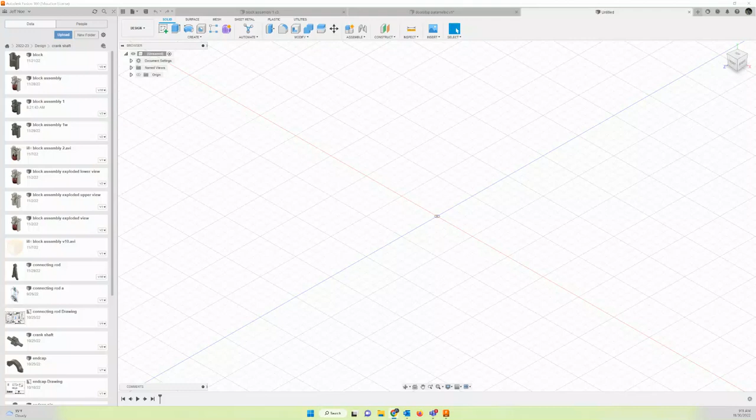So far we should have completed all the components of the engine block project. Everything I've given you to this point has been general, just an overview of the process, and I've left you to come up with your own methods for creating those designs. We haven't had as much practice with assembly, so this second video is going to go through it step by step in some detail. Let's get started.

You're seeing my screen. Where did my mouse go? There we go. This is my canvas.

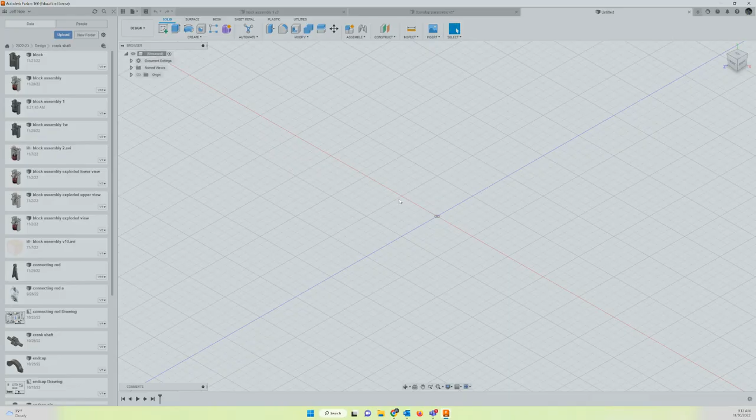It's untitled, so the first thing I need to do is save the file I'm going to create my assembly in, or when I start inserting components it's going to give me an error. So let's hit save, and I'm going to call this block assembly video, since I'm using this to create the video.

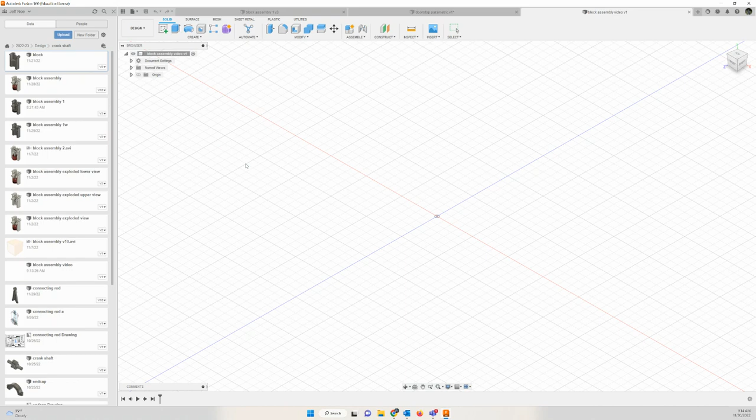The first thing I'm going to do is bring in my block. I'm going to insert into current design. There's the block, everything looks good, I don't need to move it around, we're just going to start working from here. Click OK, there's my block.

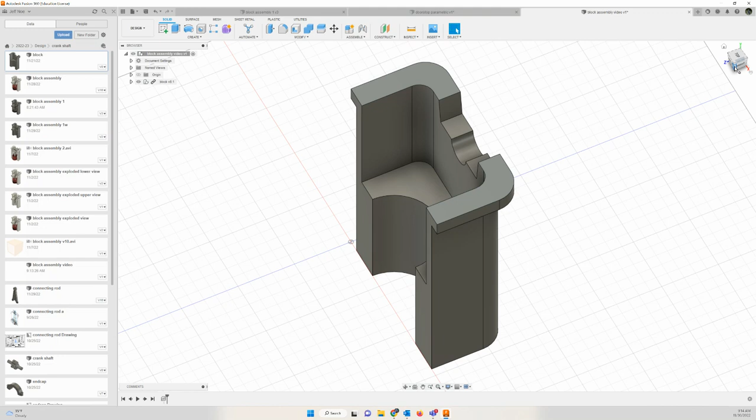Spin it around, make sure you have this overhang on the back. The depth of the overhang, or the top surface here, should be 3/8 of an inch. So you've got 0.375 inches in this section, and then this width of 3.75 inches. The dimensions are very precise - everything has to fit perfectly.

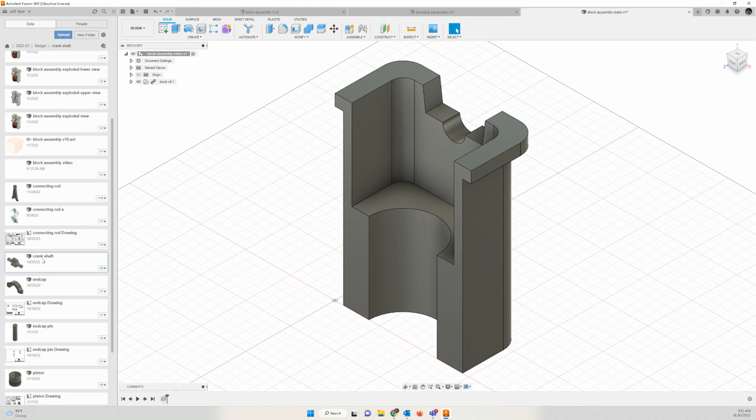The next piece we're going to bring in is the crankshaft. So I come over, here's the crankshaft, right click, insert into current design. Let's line it up the way we want it - I'm going to grab the wheel here and rotate it around 90 degrees. There we go. Let's move it out away from our design and up so it's out of the way. We can work with it there. That'll be good, let's click OK.

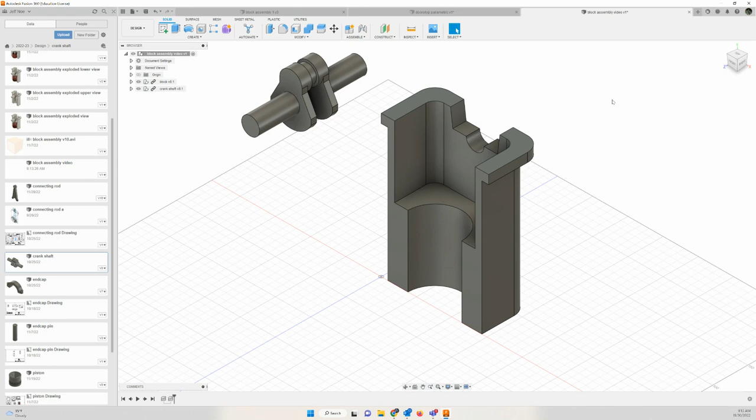Before we go any farther, let's ground our block because that's not going to move. So I'm going to ground the block, right click on it and ground. This will be part of your assignment - I want to see that red pin showing your block is grounded.

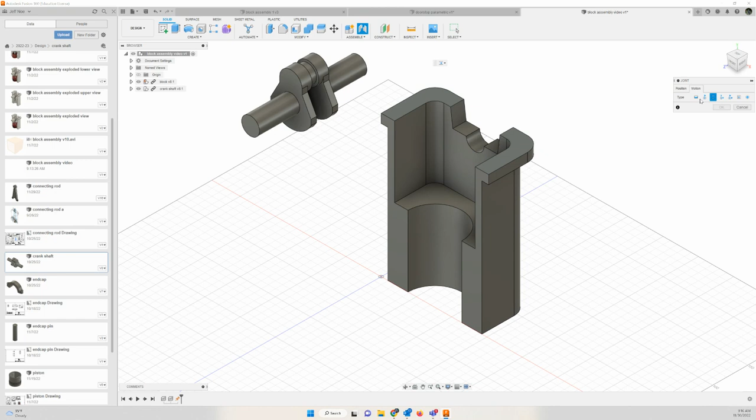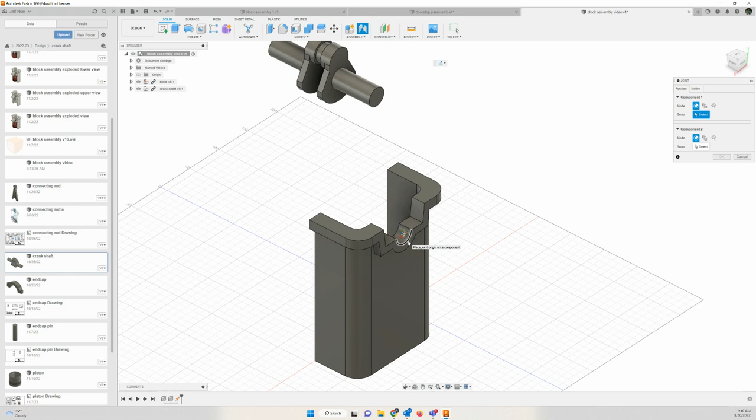Let's create our joint. This first joint's going to be a revolute. So I selected revolute, and the crankshaft will be component 1. What we're going to need to do is match up - I wish I'd put those a little closer together. Center of the end of the crankshaft here, and that's got to be centered to this arc and the outside portion of it. So I'm going to select the center of this face.

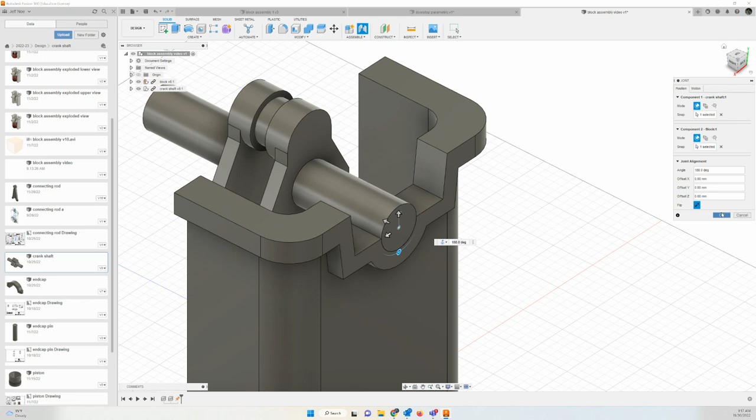Good, zoom in here, there's the outside. Hold the control key, select that center. Revolute - looks good. I'm going to click OK, go back to the home position. Easy enough, first one's in place.

Let's bring in the connecting rod. Here's the connecting rod, insert into current design. There it is, let's move it out. We're going to spin it over, 180 degrees.

And that should be fine right there. Let's click OK. Now this second joint that we're going to create is also going to be revolute, so the crankshaft is going to be able to rotate within the block assembly.

The connecting rod will be able to rotate around this section of the crankshaft. So it will be able to, as the crankshaft turns, move up and down, but the crankshaft will spin inside of it.

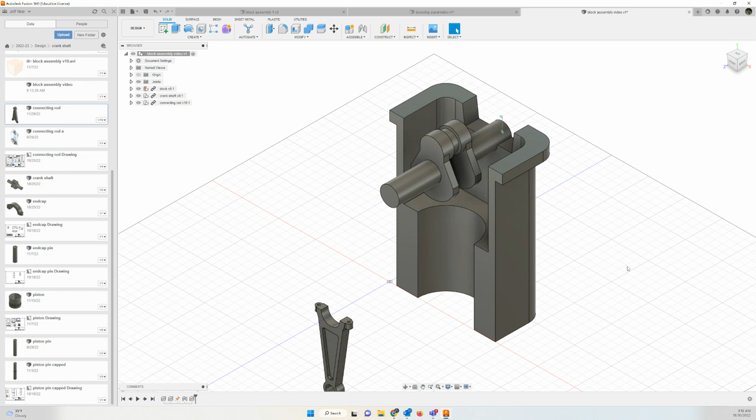All right, so let's create our joint. Start off with the connecting rod. I'm going to take the center of this arc on the outer edge. Control key, there's the snap point. Now, bring this around.

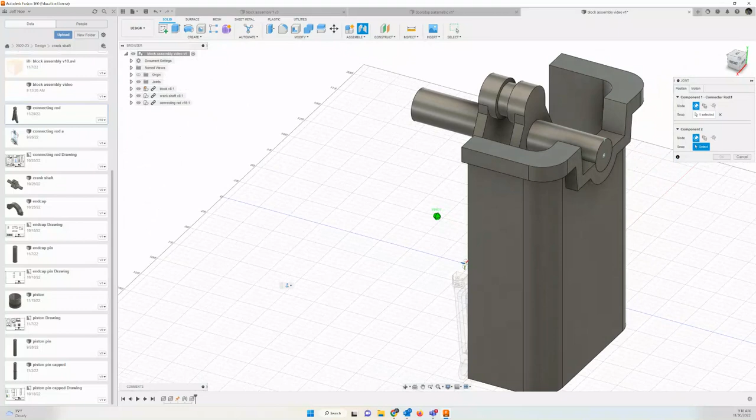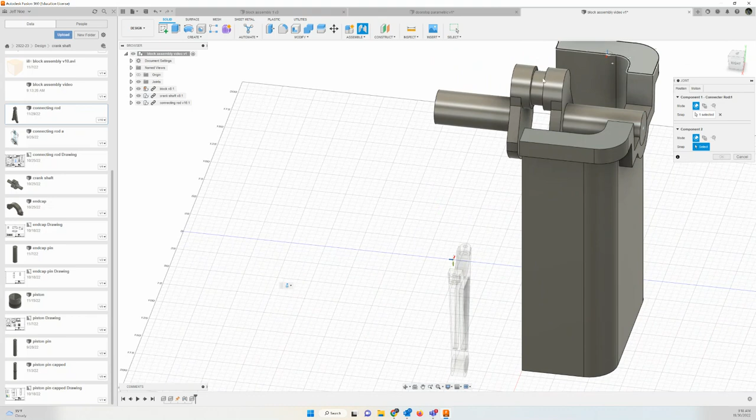So this face here, the center of this face to the center of that arc I just chose. Let's just think about where I selected it. So this outer edge, I'm going to have that match up to the edge, center of the edge of this face. So there's my edge. Let's zoom in so we can see that pretty clear.

Right there's the edge, control key, select it, revolves around it. I want to go to the right side and bring it into view. All right, there's my y-axis in the background.

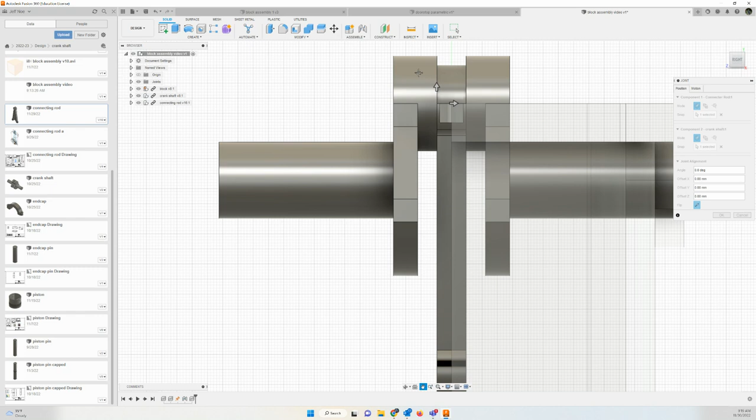It's right in the middle, and my connecting rod fits perfectly in this cutout on the crankshaft. It's not into the crankshaft, these bigger faces here or here. So that looks perfect. Click OK. Back to the home position. So the connecting rod's in place.

Let's put the end cap in place next. We're going to line up the holes on the end cap on one side, and that'll be our snap point. So insert into current design. There it is. Let's bring it out just a touch. We'll move it up here. Click OK.

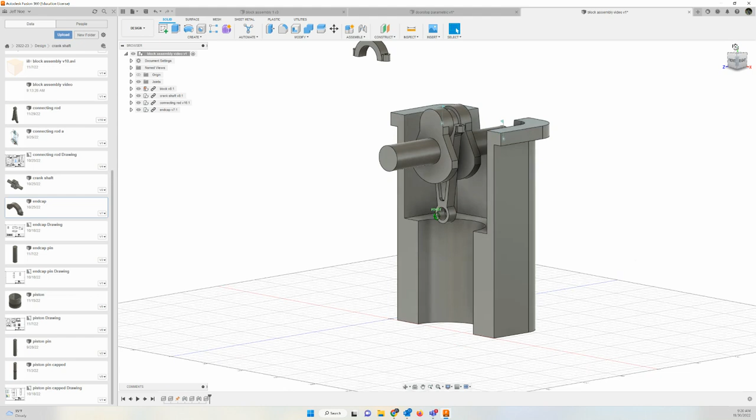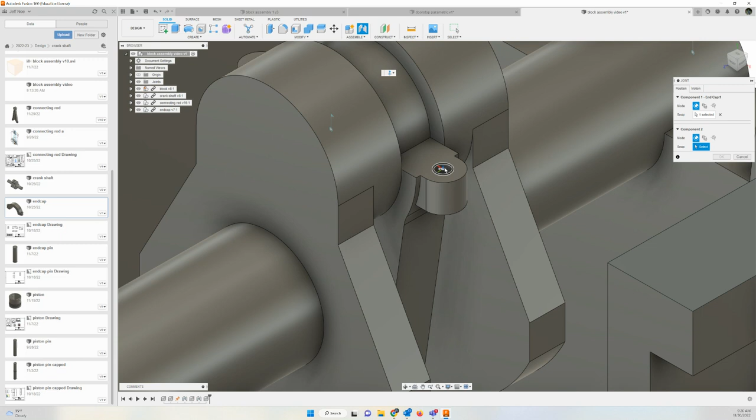So we're going to snap the center of the bottom hole to the top of this hole on this side. Let's roll it over, create our joint, zoom in. There's the hole, the outer edge, control, select it, back to the home position, zoom in on this hole. There's the hole, control, select. Oh, that's not the motion we want.

We want this to be rigid. There's no reason for that end cap to move. Click OK. Go to the home position. The end cap's in place.

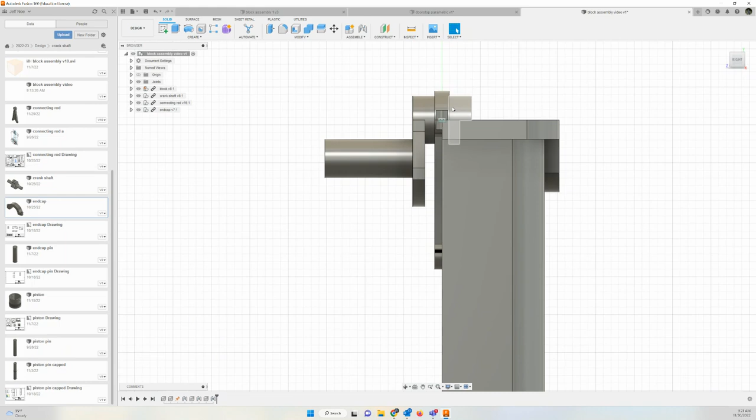We go look at it from the right side. The end cap is also matched up in that groove perfectly. Go to home, top position. We can see the x-axis through our holes. The holes are aligned just as they should be.

Let's put our pins in. So end cap pin, insert into current design. There's the pin. Move it out of the way here. All right. And the top of the pin is going to line up with the top of the holes.

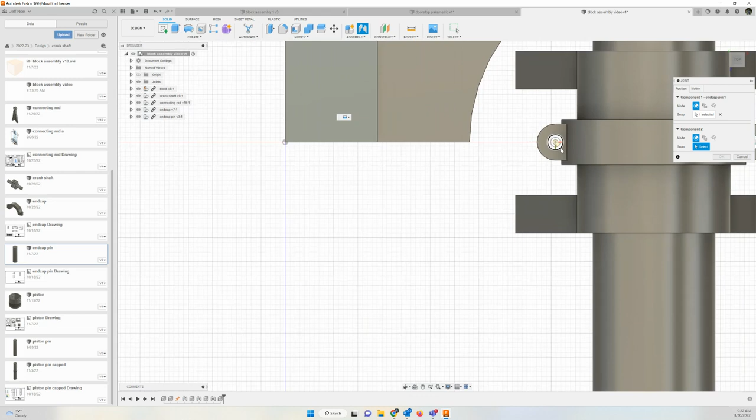So let's create a joint. We want it to be rigid because it's not moving. Center the top of that hole, right there, that looks clear. Let's go to the top. Center of the top of this hole, control key, there we go.

Now notice as I back out, the pin is in place. Just roll it over a touch. It's flush with the top. All right.

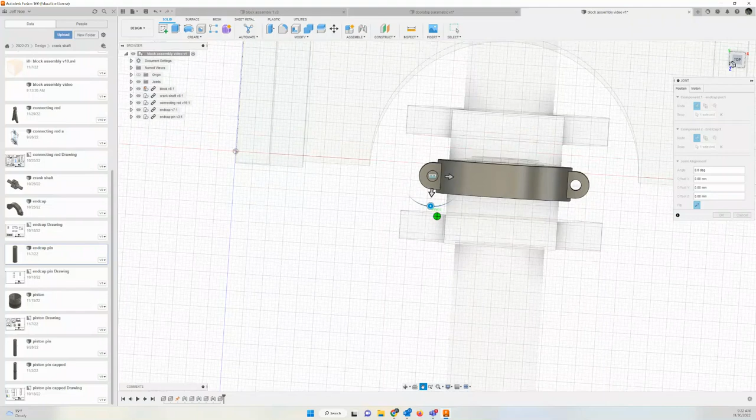And as I'm looking over the top, I can see the x-axis here on the right side, but I can't see it anymore because the pin's blocking it on the left. Let's click OK, home position, and that's in place.

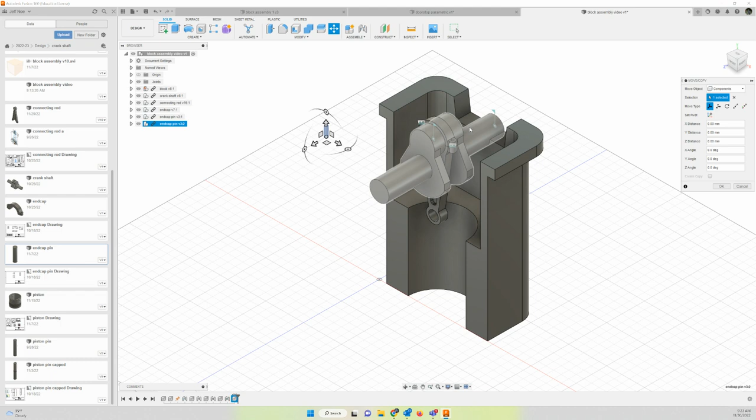Now I've got the end cap already in. I'm going to right click, copy the end cap pin. Let's paste it. There it's back again, a copy of it's back there again. Click OK. There's my end cap. Let's create a joint again.

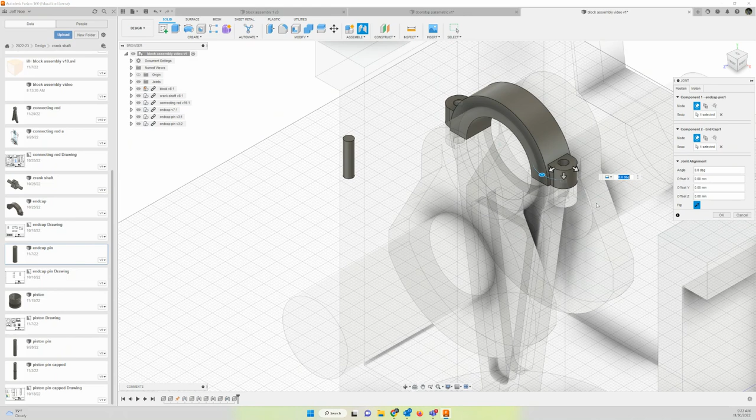Let's zoom in. The top, good. Let's go to this side. There's my hole, top. There it is in place. Looks good. Click OK. Home position. All right.

How far am I along? Okay, I only got 3 minutes left on this particular recording, so I'm going to pause the recording here and start a fresh one where I'm going to bring in the piston pin and the piston and finalize the motion.